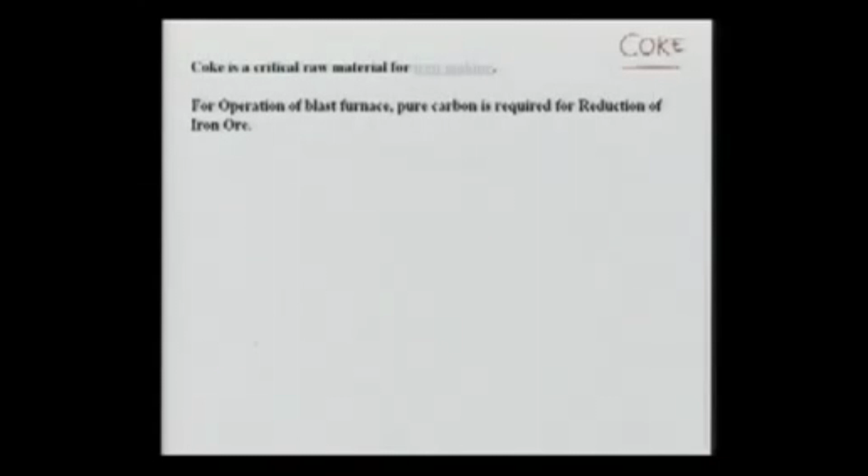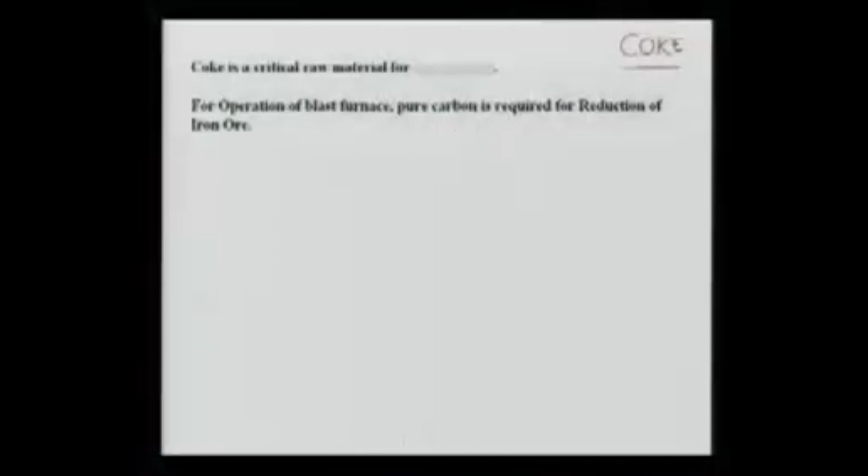So let's see what the coke really is and how it is manufactured. In all blast furnaces, if you recall from your high school metallurgical processes, for operation of the blast furnace, a pure form of carbon is required for the reduction of iron ore, and that also needs to supply some kind of energy. So this reduction undertaken in the blast furnace is essentially because of the coke. Coke is very essential in manufacturing of steel and iron, maybe in the large plants or in the small plants, and this pure carbon is called coke.

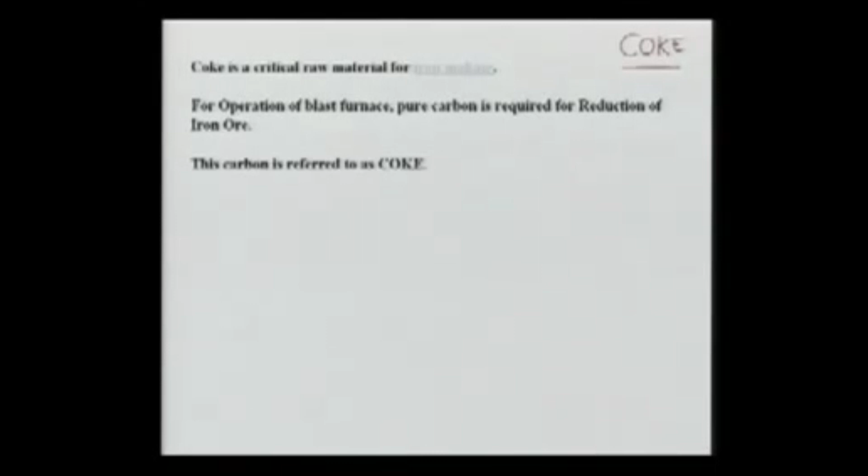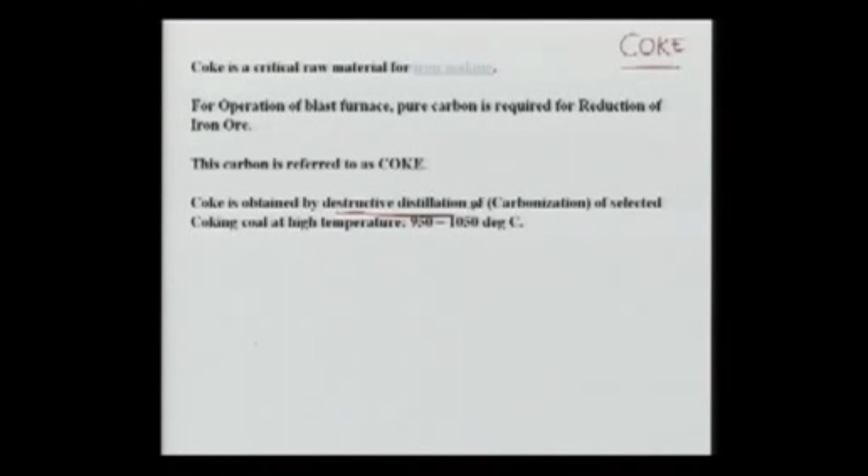How it is manufactured, we'll go very briefly through the process. Coke is obtained by the destructive distillation, and that process of destructive distillation is called carbonization of selected coking coal. That's very important. The component here is selected coking coal at high temperatures, that's about 950 to about 1050 degrees Celsius.

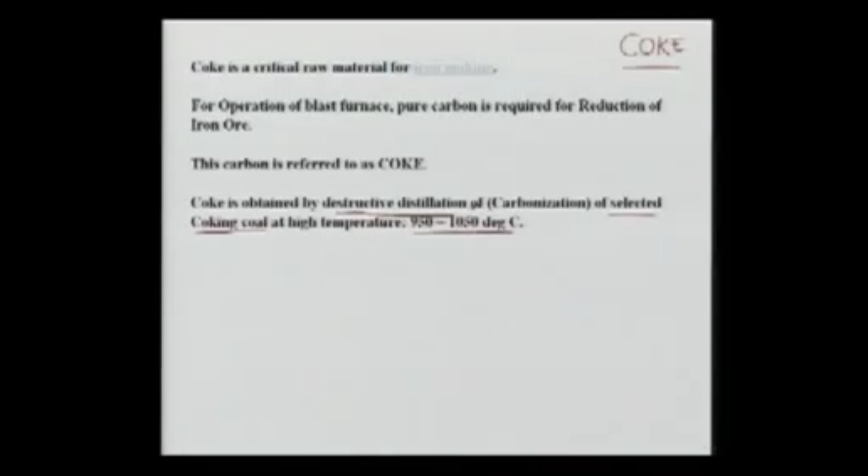Why I'm underlining the selected coking coal is that not all kinds of coal can be used for the manufacturing of coke, because we need very high quality coal with very low ash content. We don't want ash to be present in the coke, because if we have ash, that will interfere with the steel making and we won't be able to make good quality steel. So it's very important that only good quality coking coal is used for manufacturing of coke.

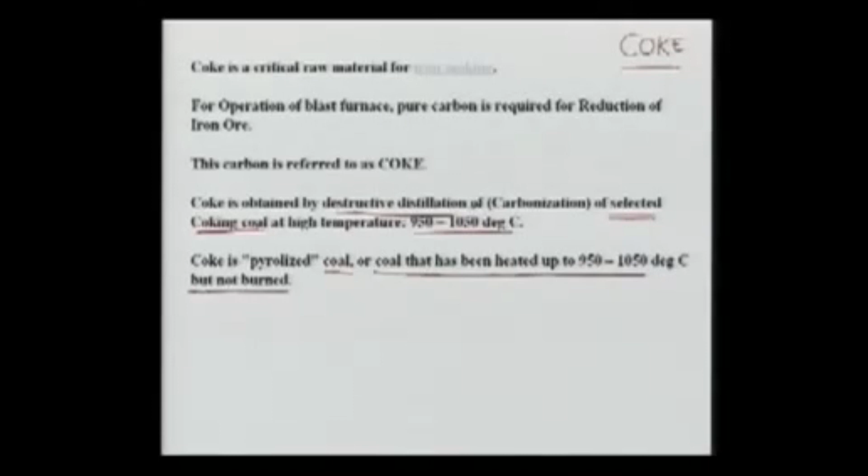Then coke is basically pyrolyzed. Pyrolyzed means heating something in the absence of oxygen, or near absence of oxygen. The coke is pyrolyzed coal, or coal that has been heated up to 950 to 1050 degrees Celsius, but not burnt. We don't want to burn the coal, because out of the coal we want to produce the coke, and we only want to heat it externally. So in the process, when we are heating it, what happens to the coal, we will see in a moment.

When you are heating the coal, complex organic molecules are formed. Those molecules break to yield gases, and we will see what kind of gases. Some kind of liquid also comes out, and solid organics also come out in the process of carbonization. But what is left, and what is of importance to us, is the non-volatile carbonaceous residue, and that is what we call coke.

And we will see the process of coke manufacturing in a little bit more detail, so that we can identify what are the sources and what is such an important issue associated with coke manufacturing that we need to discuss in this course.

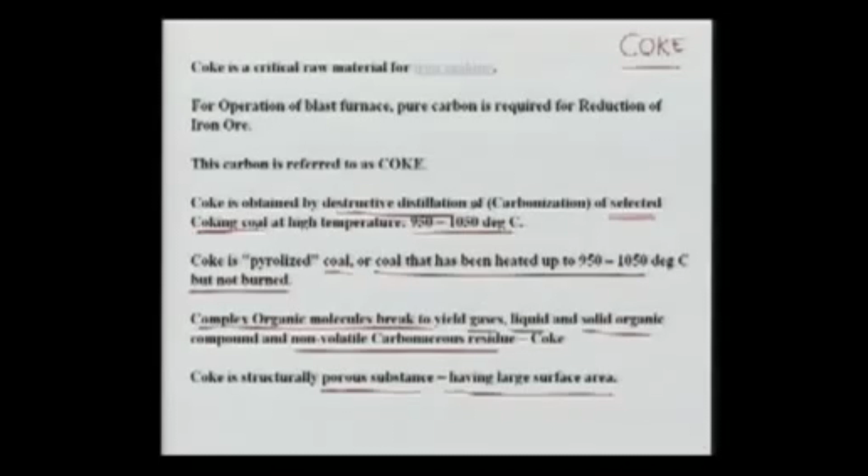What coke structurally looks like, if you look at the coke, it is a very porous substance, and the idea of having it in a porous form is to have a large surface area, so that the reaction, especially the reduction process that is going on, effectively takes place in the blast furnace or wherever you are making the steel.

Let's see a picture which is more of a schematic picture, and that gives you an idea. I'll give you the idea of the dimensions a little later, but just see what it takes to make the coke. Here you are looking at the schematic picture, and this figure is the general layout of the byproduct coke oven battery. I'll explain what is the meaning of the byproduct, but what you see here is a long housing kind of thing, and there are lots of slits, as you can see here. For example, I'll just hatch a small slit here.

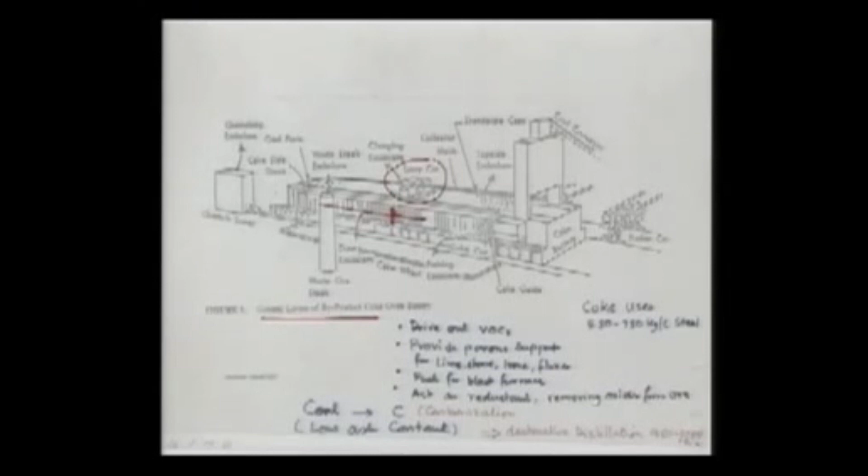This is what's called a coke oven. There's a series of ovens, as you can see, there could be hundreds of them in this direction. On top is what we call the Larry car, which holds the coal and fills the ovens from the top.

Down here you see little rectangles, that's where the heating is done. Gas is burned through this area, the heated gases go up and cook the coal, which gets heated up in the process, and emissions of gases or complex molecules get emitted. Once the coking operation is complete, the coke is ready, and as you can see, coke is pushed out and put into the coal car.

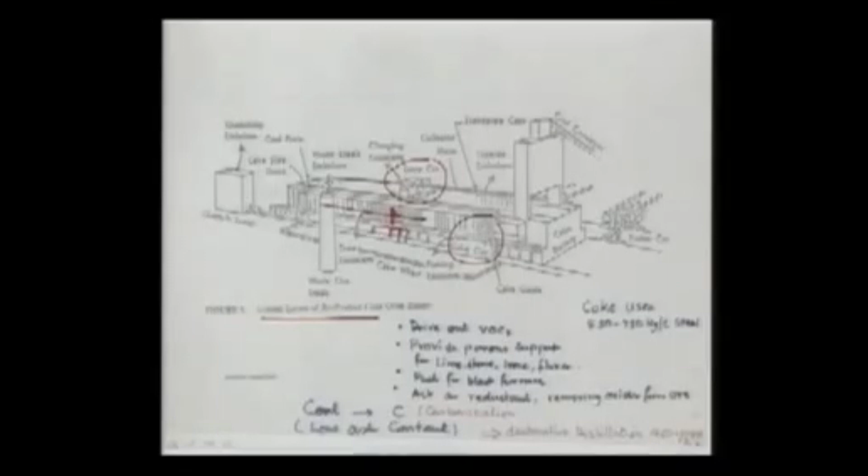The idea here is to drive out the VOCs, which stand for volatile organic compounds. We don't want volatile organic compounds because we want the pure carbon. So we basically heat things up, whatever is volatile will go away, providing porous support for limestone and other fluxes in the blast furnace. It's also a fuel for the blast furnace and acts as a reductant, removing the oxides from the ore. So basically we are transferring coal into carbon using destructive distillation.

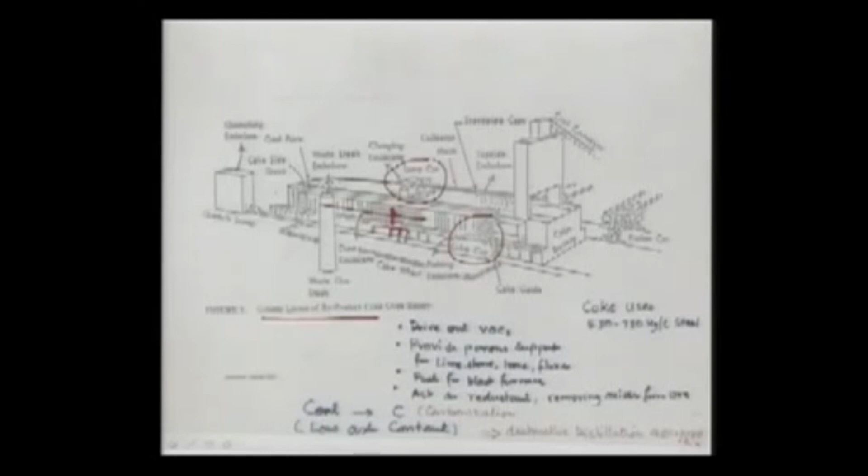What I would do is show you a bigger picture, so things become more clear to you, and that picture just follows.

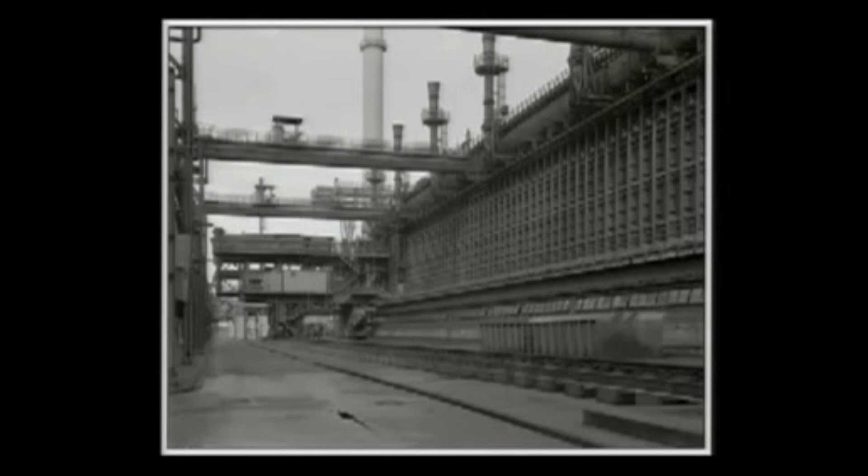This is a picture taken from the side or from the ground. You see here the Larry car was somewhere at the top, the person was standing somewhere there, but now we have the picture taken from the ground. These are the ovens, as you can see, this slit here, for example, is an oven.

Here at the bottom is what we call the under-fire. Some heating is done here, and this heat flows, the hot air flows around the oven but doesn't come in contact with the oven, because we don't want to burn the coal, we just want to heat it. It's like cooking in the kitchen, we don't want to burn our food, we just want to heat it. So the coal is heated externally, and the under-fire heats everything and goes out through this chimney, as you can see.

After some time, once the coke is ready, because we have to cook the coal at a temperature of about 950 to 1050 degrees Celsius, and the cooking normally takes between 20 to 30 hours, once the coke is ready we need to push it out, and then we will see.

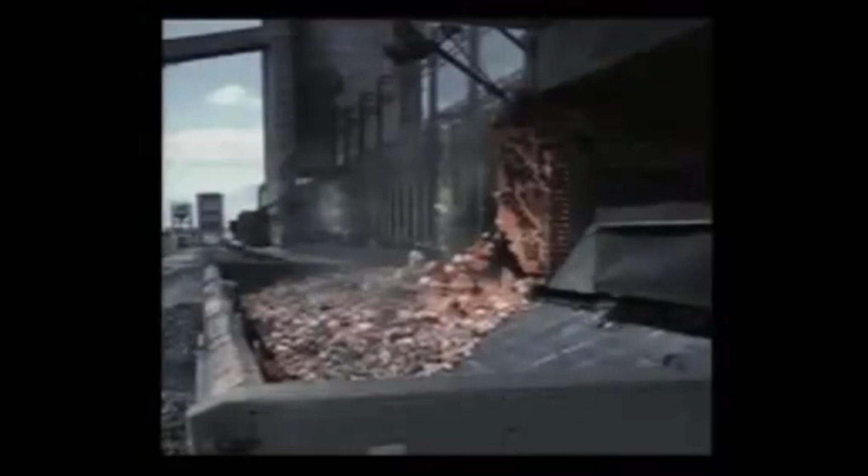Okay, maybe I'll show you this picture before that. We will show the next picture. See, now what is happening is coke is ready, so it must be driven out. So you see here the coke is being pushed from where? From the ovens. So see here the red, it is not burning, but it's a very hot thing, and then here what you see is another car or cart, if you like, then quickly it is transferred here, and then this must be immediately cooled, and we'll see how this is cooled in a moment.

So this is what the real picture was, just so that you get an idea as to what is happening, what are the size of the machines that we are talking about. They are huge things, and it also means huge pollution. So what we would do is show you the earlier slide. Okay, now we will talk specifically about the sources of the air pollution.

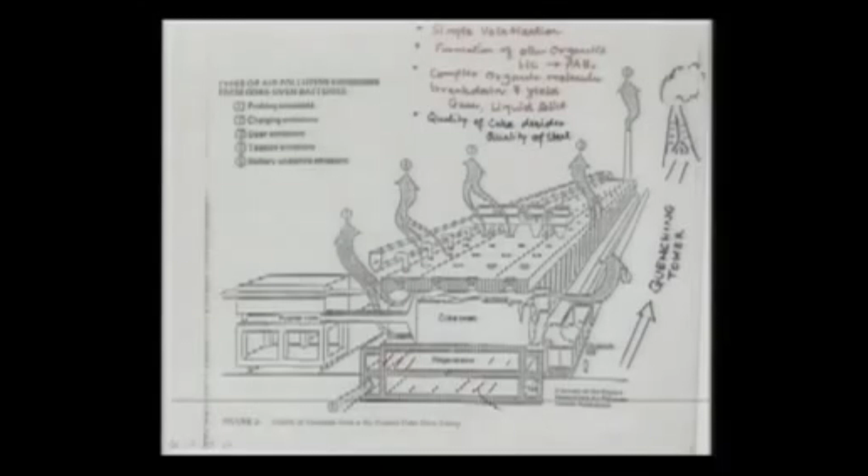Okay, so here what you see, now you have the clarity. Now we are seeing both the pictures from the top as well as from the side, and also the bottom portion. And the bottom portion, as you can see here, is a kind of regenerator, but mostly we call it under fire. Under fire means we are firing some gases to give us the heat, and that heat should be used by the ovens. And you see here inside this picture, this is your coke which is being made ready.

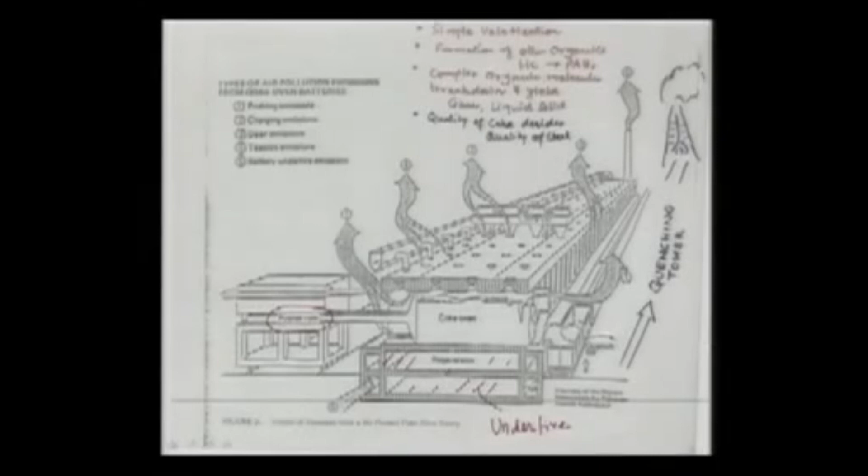Okay, so this is coke, and as you can see here, as coke gets ready, it's being pushed. You see here, this is called the pushing arm. The whole thing is being pushed, takes a lot of energy, huge machinery requirement, and you can see this whole thing is falling down onto what is called the quench car. Can you see here? Quench car. Why quench car? Because we must quickly cool off the hot coke.

If we don't cool it off, what will happen is, it's hot, it's open in the air, oxygen is available, and when oxygen is available, things start burning. So in fact, if you don't take it and quickly quench it, it's going to catch fire, and you can see the flames coming out, and our entire purpose of coke making will be defeated. So as soon as the whole thing is out, we should quickly take it to the quench tower. The whole thing is like on a railway track, and this is pushed quickly in this direction and taken to the quenching tower.

I have drawn this picture of the quenching tower, and we'll see a little later what the quenching tower is and what it does. But the idea of the quenching tower is to put lots of water, tons of water, which is stored on top, onto this coke, because we need to cool the coke down. We don't want it to be exposed to the atmosphere so that it starts burning. Then we are in trouble, both from the pollution point of view as well as from the production point of view. So this is one part.

Let's go back onto the top of the coke ovens and see what is happening. You see here the coke oven top. This is the Larry car which I showed you, and these are what we call the charging holes. For example, this is a charging hole, this is a charging hole, this is a charging hole. So the Larry car moves back and forth, and it fits exactly onto the charging hole. For example, whatever this oven is, that's being charged. So here this is a hopper of the Larry car which has coal, and this is another hopper which has coal, and it is dumping the coal inside the oven.

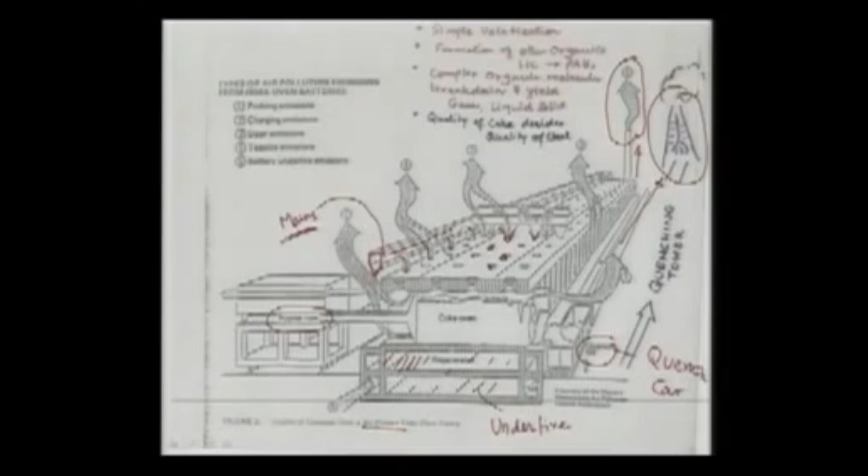So now pay a little attention: although we have the mains, and most of the emission is being collected and going to byproduct recovery, where we'll control this source, in spite of having this system there is still air pollution that takes place. The major sources, as you can see, are listed as number 1, number 2, number 3, number 4 and number 5, and I would also say number 6, which we will talk about in a moment. So number 1, as you can read here, is called the pushing emissions.

See here, pushing emissions, because as you are pushing, whatever vapor compounds are there are getting emitted from the sides. Earlier everything was closed, now it is open because we are taking things out. So all these emissions take place.

The second thing you can see here is the charging emissions. The charging emissions are when you are charging the coal, and who is charging the coal? The larry car. When the coal is being charged, as it replaces the space or the air underneath, the emissions take place. That is emission number 2, and this is a very significant emission. In fact, the person wearing the mask in the picture I showed you was trying to stay far away from the larry car so that he is not exposed to the air pollution. So here the emission takes place as the coal is being fed into the oven.

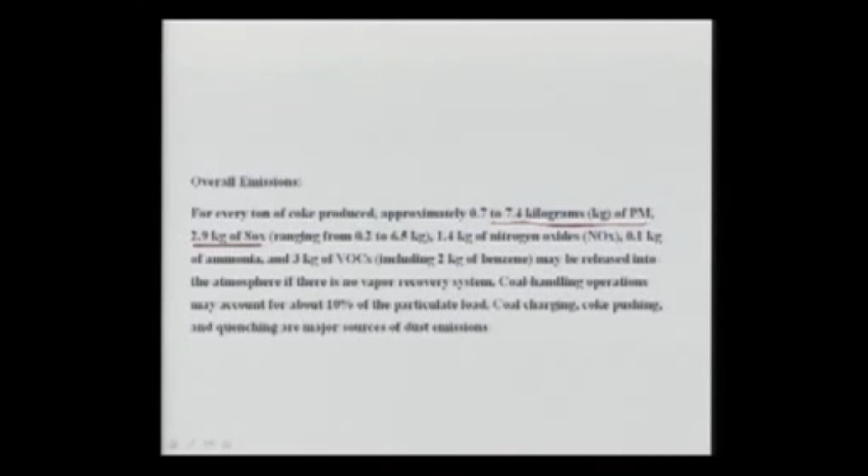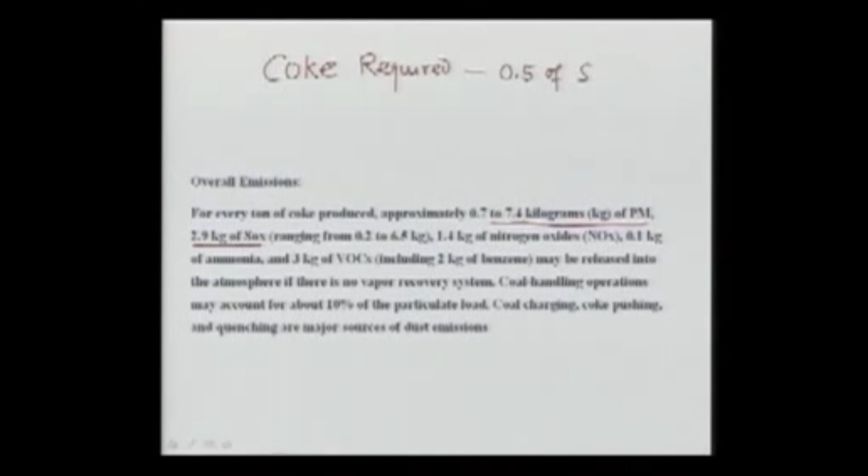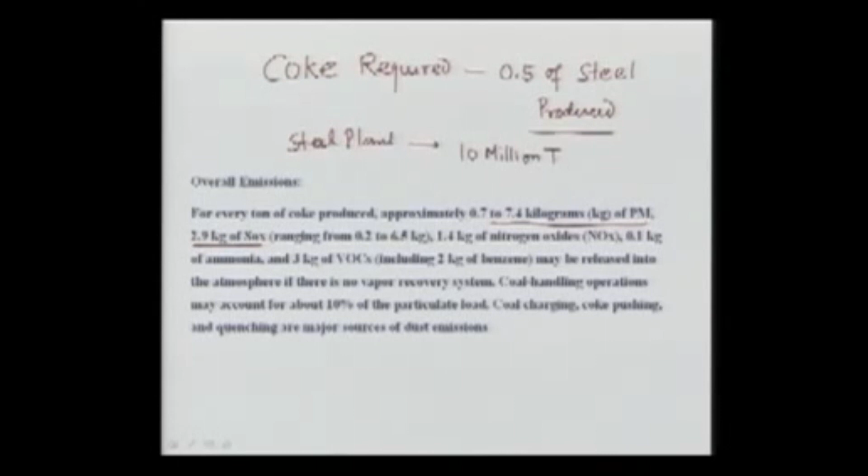I'll give you a little feel right now as to the coke requirement, so that you know the quantity of coke required. It is almost 50% of steel produced, and you know that steel plants are very huge, very big plants. Steel plant size varies, but a typical plant on the larger side can be a 10 million ton plant. This is a very large plant, with an annual capacity of 10 million tons.

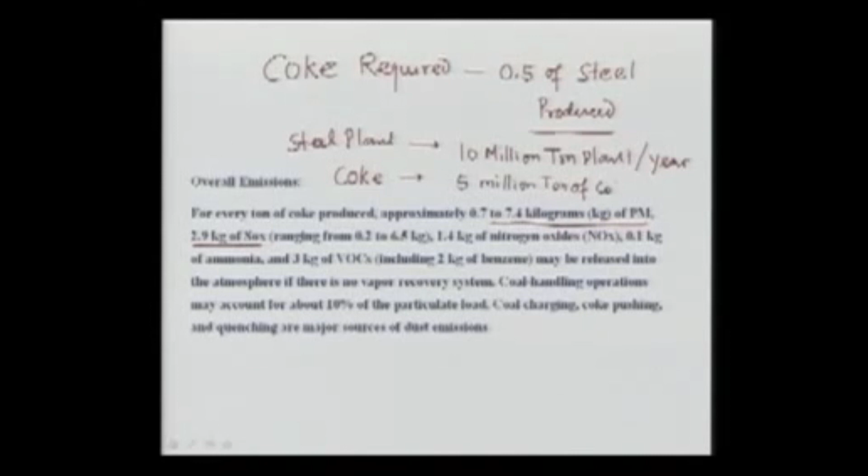So, to give a little feel, this plant will require approximately 5 million tons of coke per year. See, these are not small quantities that we are talking about.

And then once we are making the coke, what are the emissions taking place? 0.7 to 7.4 kilograms of particulate matter, 2.9 kg of oxides of sulfur, 1.4 kg of nitrogen oxides, 0.1 kg of ammonia. Look at that. You wouldn't expect ammonia, but ammonia is also emitted. 3 kg of VOCs. You remember VOCs stand for volatile organic compounds, and most volatile organic compounds are cancer causing and can very adversely affect human health.

So that becomes very, very important. Including 2 kg of benzene, and you all know benzene is a carcinogenic compound. Benzene is also emitted from automobiles, and we all talk about benzene control. But this is in no way a small amount; this is a huge amount, and may be released into the atmosphere if there is no vapor recovery system.

Vapor recovery system is the same as I was talking about, the byproduct recovery plant. If there was no byproduct recovery plant, the emissions could be of this order as specified in the slide. Apart from this, coal handling operations may account for about 10% of the particulate load. Coal charging, coke pushing and quenching are always a major source of dust emissions.

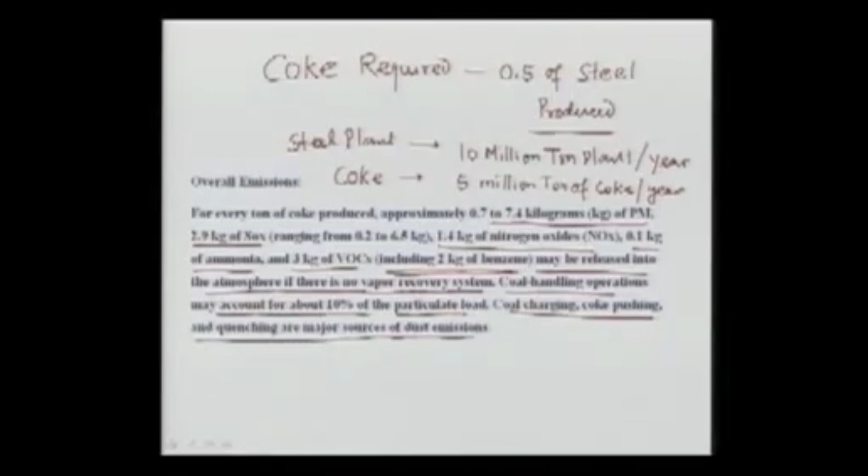So you can see both in terms of quantity the emissions are large, and also in terms of toxicity, because some of the compounds that are emitted are very serious cancer-causing compounds, and we need to control them. Okay, let's go to the next slide.

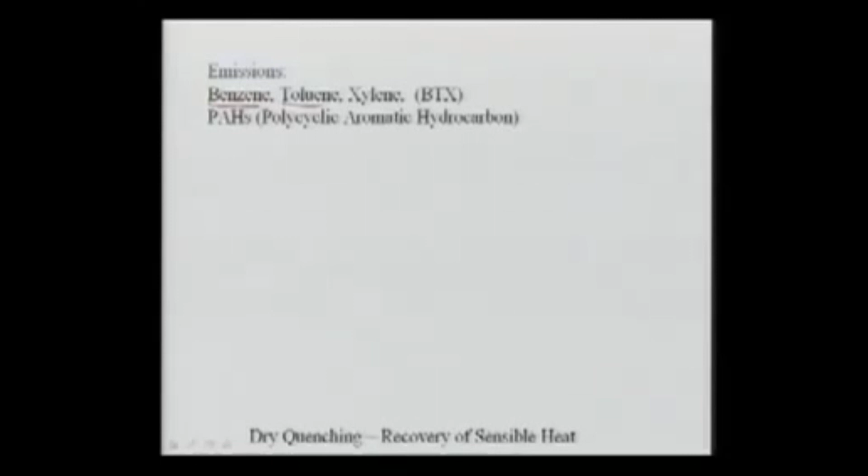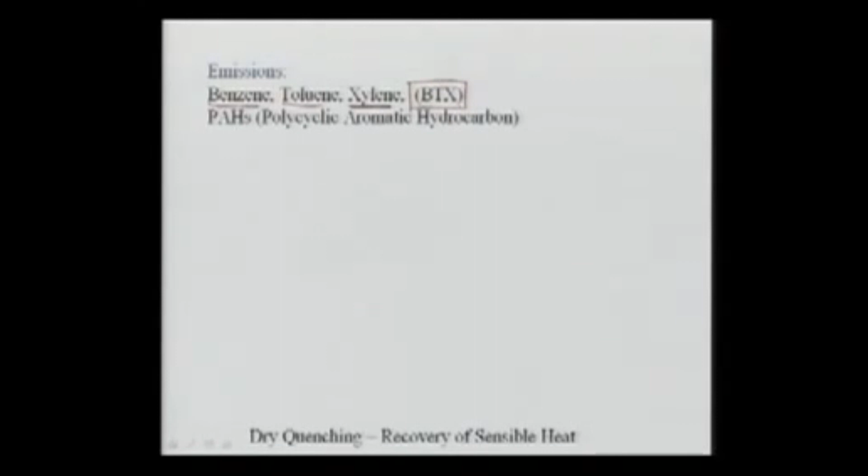So the emissions are not only particulate matter, SOx, ammonia, but there are more things. Now we are trying to get a little more specific about the kind of pollution taking place. Benzene I said earlier, but toluene is also emitted from coke making, and so is xylene, and the common name given to these three compounds is BTX. In the rest of our discussions, we will refer to this emission as BTX rather than calling it just benzene, or benzene, toluene, xylene.

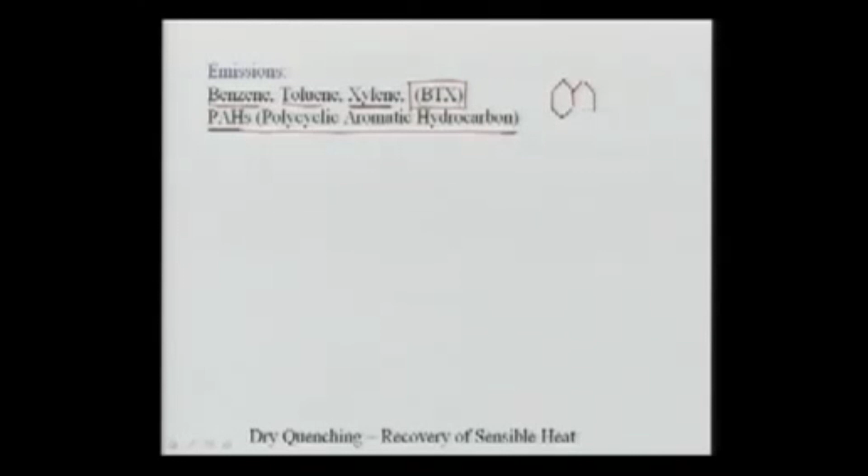Apart from that, these emissions also include PAHs, which are polycyclic aromatic hydrocarbons. These are again a group of compounds, very toxic, proven carcinogens, meaning they can cause cancer in the human body. So this becomes an important issue. If you don't remember what aromatic hydrocarbons are, when you have 2 or more benzene rings fused with each other, that becomes a PAH.

So you can see here there can be many benzene rings as I am drawing them, that can also be combined like this. Okay, this is a typical chemical structure of PAHs. This is just one compound, and in fact many hundreds of PAHs are formed, and most of them are carcinogens, which can cause cancer, and therefore we need to control them.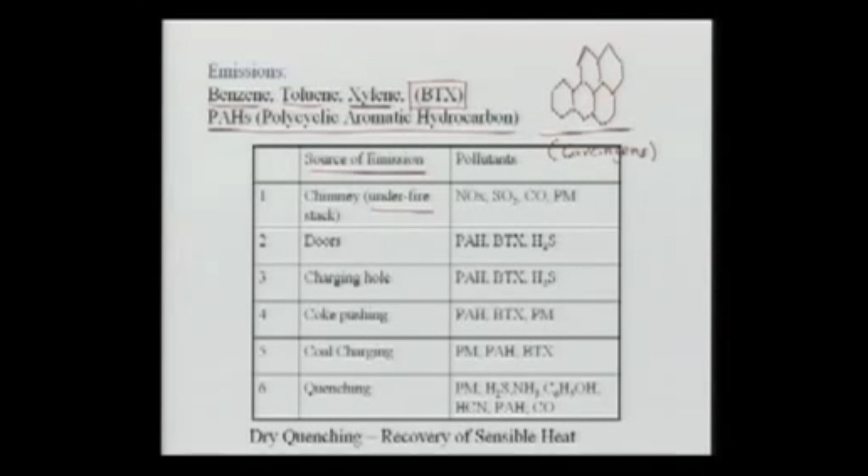So this is the table. What we had discussed were the sources of emission, but we didn't discuss what kind of emission comes out of a particular source. So I made this table so that you can see it depending on the source. As you remember, we talked about 1, 2, 3, 4, 5, 6. The first source was the chimney or underfire, so it will have combustion-related emissions, because here we are burning things.

NOx, you remember what NOx was? NOx is the summation of NO plus NO2. So you have NOx, sulfur dioxide, some carbon monoxide, and PM, which is particulate matter, that is the dust.

Now, we also remember the door leakages. We can simply write here door leakage, and what emissions will come out? PAHs, BTX and H2S. The dust is not likely to come out, but carcinogenic compounds, a serious problem. We also have benzene, toluene, xylene and H2S.

Why H2S? Because the coal may contain some sulfur, and we are not burning it; conditions are reducing. So this sulfur will come out as H2S, hydrogen sulfide gas. It is worthwhile to indicate that from the doors which are leaking, more H2S comes out, and as you can see here, the emissions are a little yellowish. H2S gives a little bit of yellowish color.

So sometimes you don't even have to go and check; you can see something yellowish coming out from the coke oven doors and say, look, this is the oven which is leaking, and we need to do something about it. If it was colorless, you wouldn't see anything or know what emissions are taking place. But the moment you see the yellowish thing coming out, you are sure that particular oven is leaking, meaning the door is not very tightly placed.

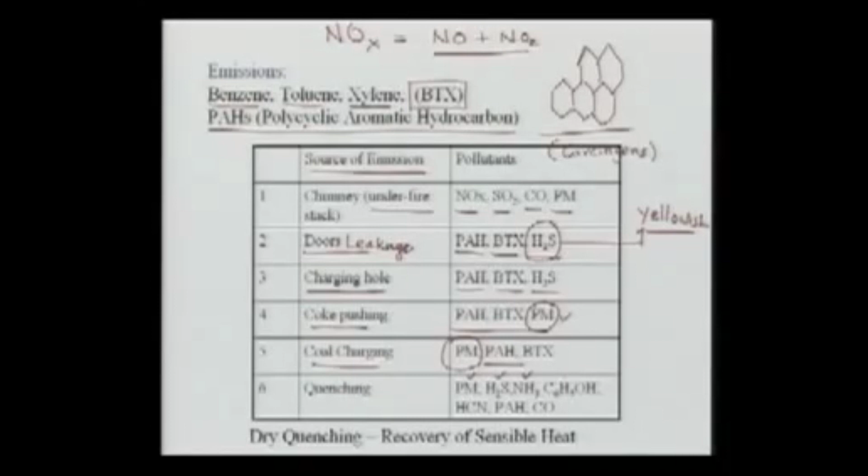In the quenching, when the coke is ready, then we are taking it for the quenching operation. We put tons of water onto it. So that very high temperature thing is cooled off. So there will be particulate matter, H2S comes out, a little bit of ammonia and some of the alcohols, and it has also been reported that some amount of cyanide in the form of HCN is either likely to be emitted in the air or will become part of the water, because we are quenching the coke with the water. So some of the cyanides also have been reported, some of the PAHs and some carbon monoxide.

So what we have learned here is that in spite of the good recovery system, and what was the recovery system? Through the mains, through the duct in which we are sucking the gases or the volatiles that were being formed, there could still be emissions, and these emission quantities can be large, and not only large, they can be very serious in terms of their toxic nature. So this issue of the coke ovens becomes very significant, because it has a direct and very significant impact on public health, and especially on the people who are operating the coke ovens. Remember the person standing with the mask on his face.

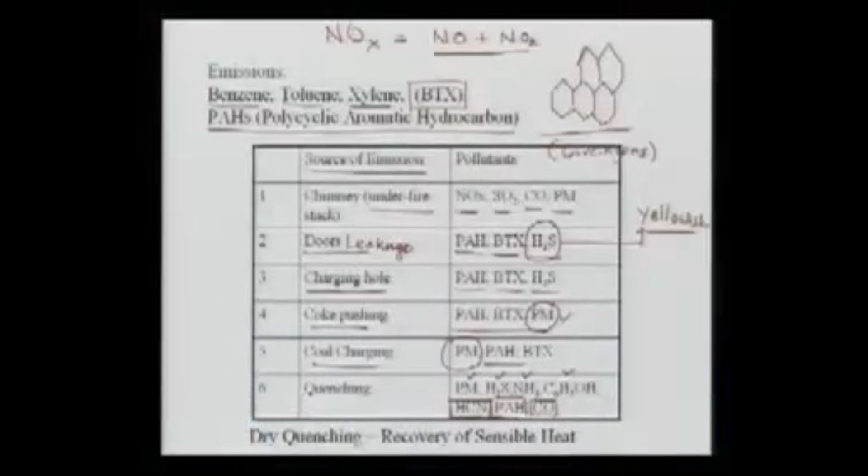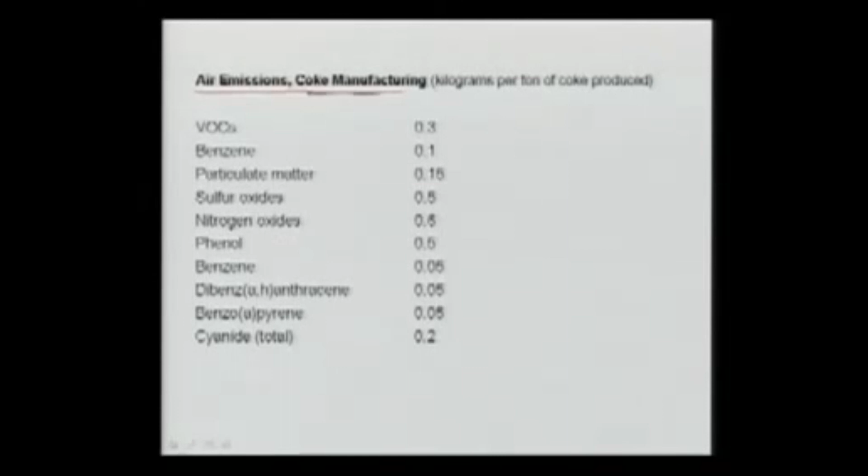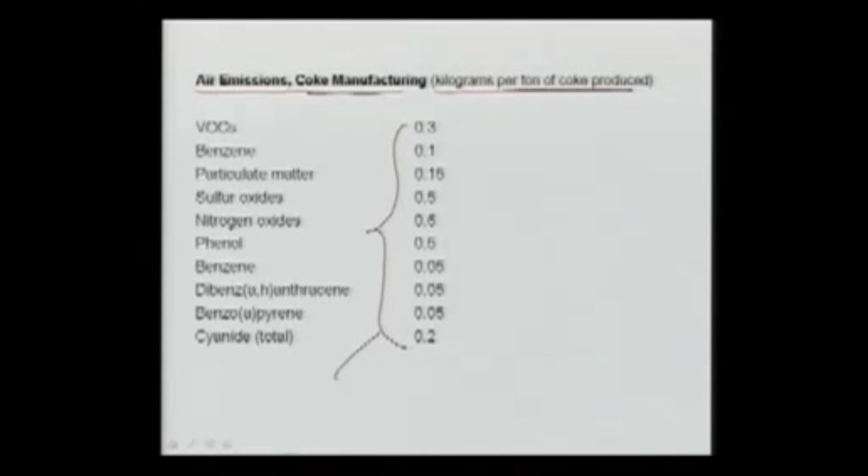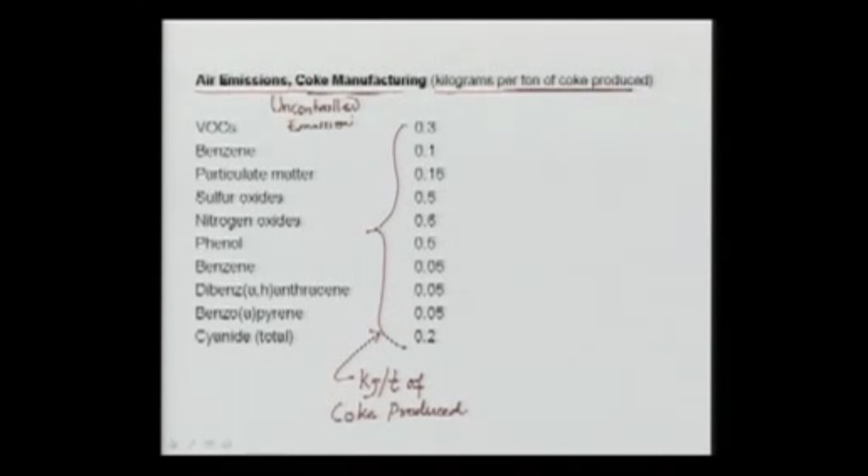Let's take our discussion further, and let's talk about some of the controls. So this is a little table here, and this table shows the total air emissions that can take place from coke manufacturing, and the units here, don't forget, are kilogram per ton of coke produced. What are the units? kg per ton of coke produced. Also I must mention here that these emissions are the uncontrolled emissions. These quantities are not small in any sense, they are really large quantities, and they can influence the air environment.

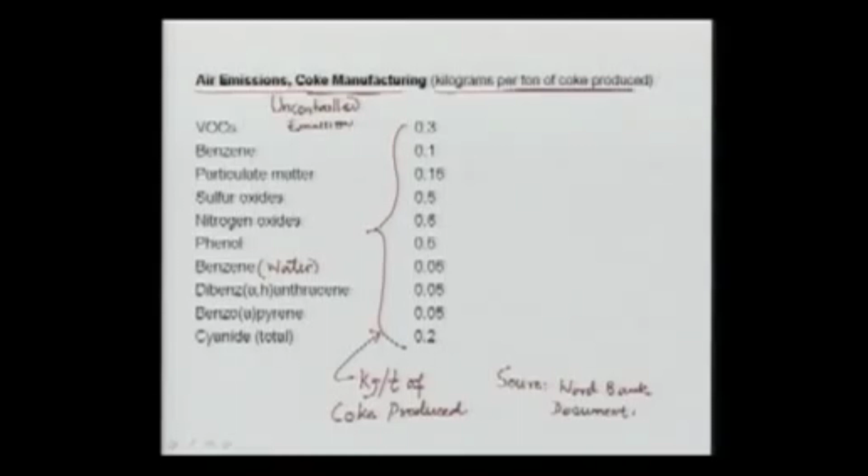You also have benzene here; this benzene is probably in the water, and the source where I have gotten this information is the World Bank. I should have given you the source actually, World Bank document. Okay, a fairly good idea of what is being emitted and what quantities they are likely to emit, and why the importance, because of the associated toxicity. Okay, I want to do an example for you just to give you a feel that these emissions are not small, they are serious emissions. Okay, the example is the following.

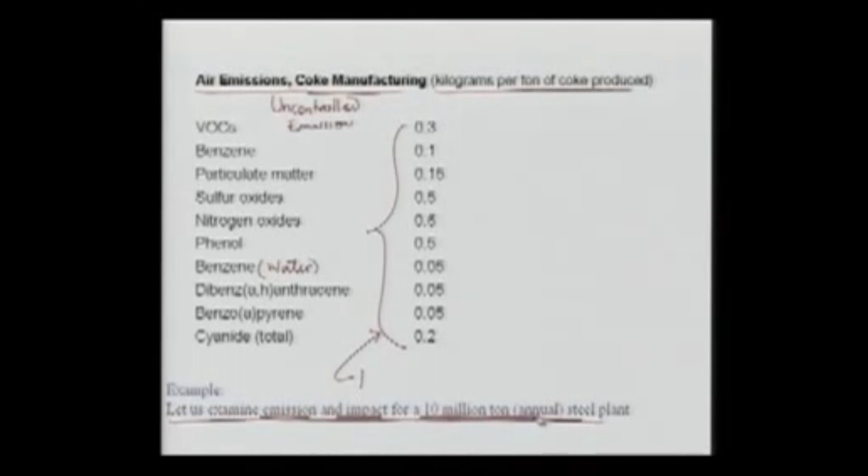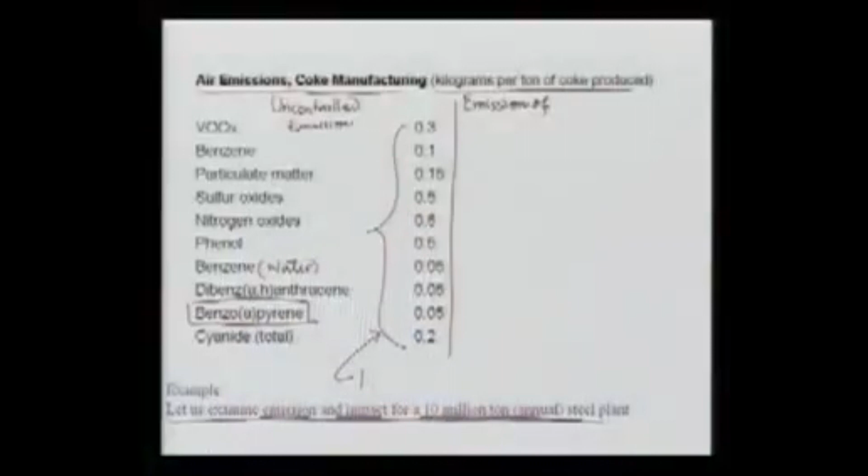Let's examine both the emission and the impact for a 10 million ton steel plant, which is producing annually 10 million tons of steel. So let's make a little space here. So we'll see the emission of, let's say, a compound. We'll just take one example. Let's take the example of this one, because this is the most dangerous compound in the category of the PAHs. Benzo(a)pyrene is the PAH having 5 benzene rings. So emission of BaP, in short we call it BaP. Let's say the uncontrolled emissions.

Okay, so for a 10 million ton plant, the coke that it needs to produce is how much? 50% of the steel that it is making. So the coke you need is 50% of the steel that you are making. And how much steel are you making?

Tons per year, okay, so this is my coke requirement, simple thing. Now I want to know the coke in terms of tons per day, because I also want to see the impact. So I have 0.5 into 10 into 10 to the power 6, and suppose I am taking about 350 days of the working of the plant. So if I take this as 350... am I doing right or wrong? Yeah, I'm doing right. Okay, let's write it properly.

Now this is the coke I need in terms of tons per day, not per year, so tons per day. Let's write the spelling correct.

Okay, now you can also tell me the BAP emissions, will be how much? Let's go to the factor here, 0.05 kg per ton of coke produced. So I can say the BAP will be 0.05 times 0.5 times 10 million, divided by 350. So that is what is my BAP.

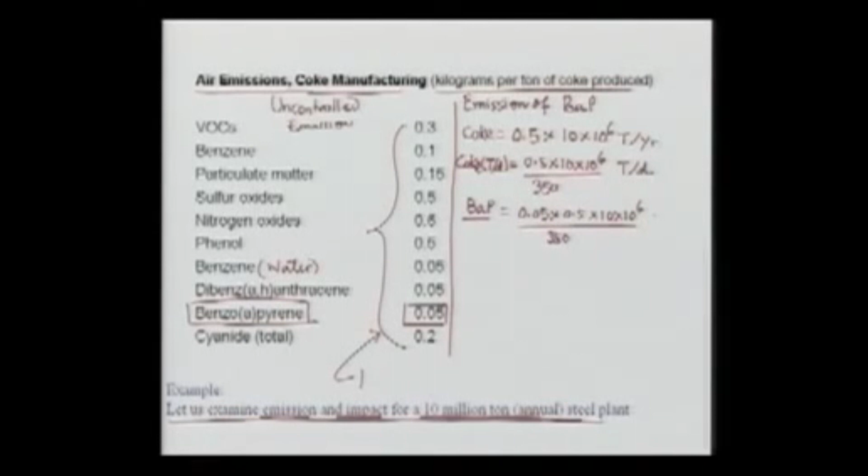Now you have to tell me the units of this one. What will be the units? Because don't forget the units are kg, kilogram, because this is nothing but kg per ton. So this will be my kg per day, because my factor has units of kg per ton. So much ton was producing, so for every ton 0.05 kg is produced, okay, so this becomes the BAP.

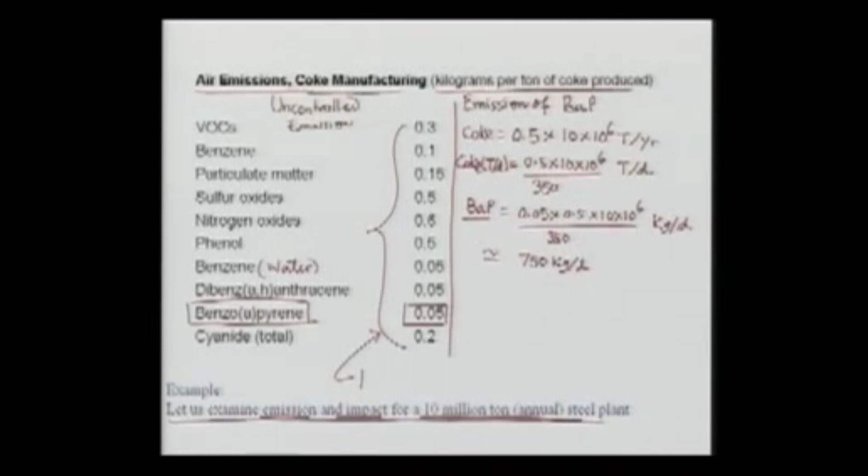So a little calculation, you will see that the BAP emissions come out to be approximately 750 kg per day, that will be nearly 750 kg per day. So what we are saying is that the emission of BAP, there's some approximation I have done here. So let's write it approximately 750 kg per day. This plant is likely to emit 750 kg per day if it is uncontrolled.

Don't forget that what I said here earlier, this is the uncontrolled emission. Now let's also see what it really means to the people living in that area, because after all, public health, good health of the people is what environmental engineers always try to do. So suppose, it's a simple example or calculation that we are doing. There are more complex, difficult ways to do all this. Assume that the entire BAP amount is spread into the volume of, let's say, 5 kilometer by 3 kilometer and height of 1 kilometer. Let's say everything disperses into this, and what it really means in terms of the concentration of BAP that people will be breathing in their lungs.

Okay, so that's what we want to find out, so let's do the concentration part. The concentration of BAP, and this is talking about every day, so almost 750 kg is emitted. How much volume? Let's write in meters: 5 kilometer equals 5,000, into 3,000, into 1,000. And then I can convert kg into grams, and this grams into micrograms, and the units now I am having is microgram per meter cube. So 9 zeros I can remove. So you are left with 750 divided by 15, and this comes out to be 50 microgram per meter cube.

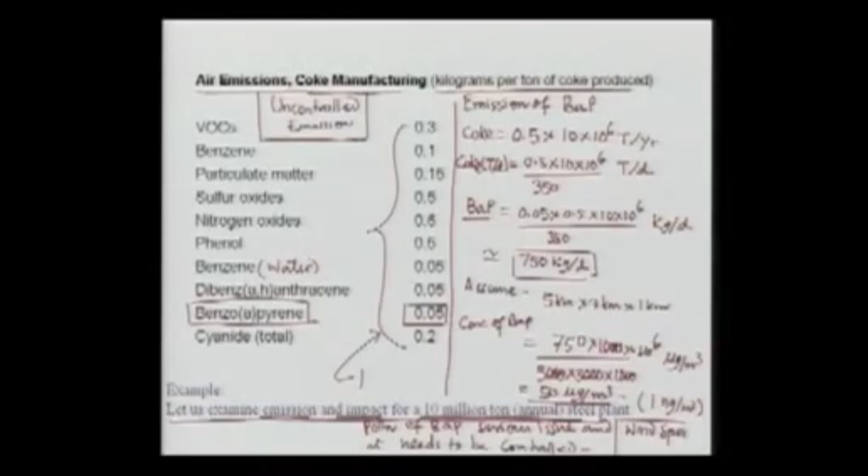Just simply saying BAP must be controlled is not enough, but in order to plan the control, we should know where to control, what are the sources and what are the difficulties. So we will talk about some of the control systems people are using. I think this is a simple calculation. Normally we should also account for the wind, but we have taken a simple example just to give you a little feel. The actual modeling part that we learn a little later in the course will require more information on the meteorology, the wind direction and other things, but that we won't discuss right now.

Okay, now let's talk about the control. Let's quickly recap what we have done so far. We have talked about the process, what is coke, why it is required, what is the process, what are the emissions, what are the emission sources, and within the emission sources what are the important compounds that we need to know. Then we did a little example to show how much quantities could be released and how much could be the impact.

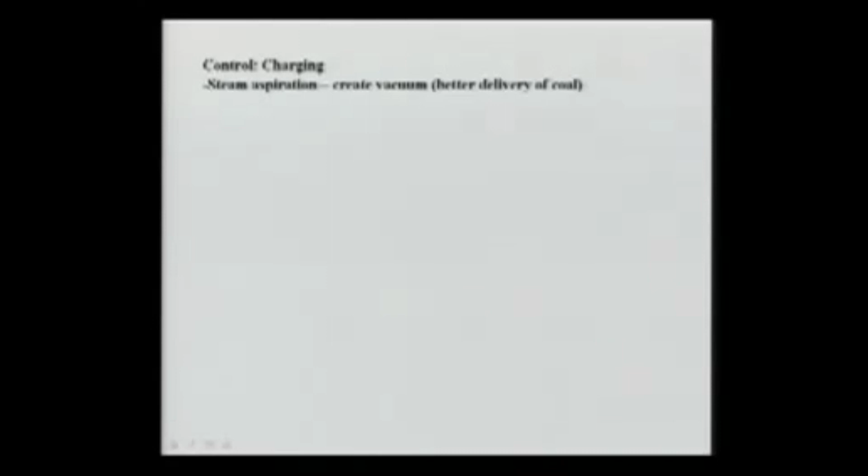So comes the question, we have concluded that we need to control. So what we do is, let's see, in the main duct, okay, the problem which we are talking right now is at the time of charging, what can be done.

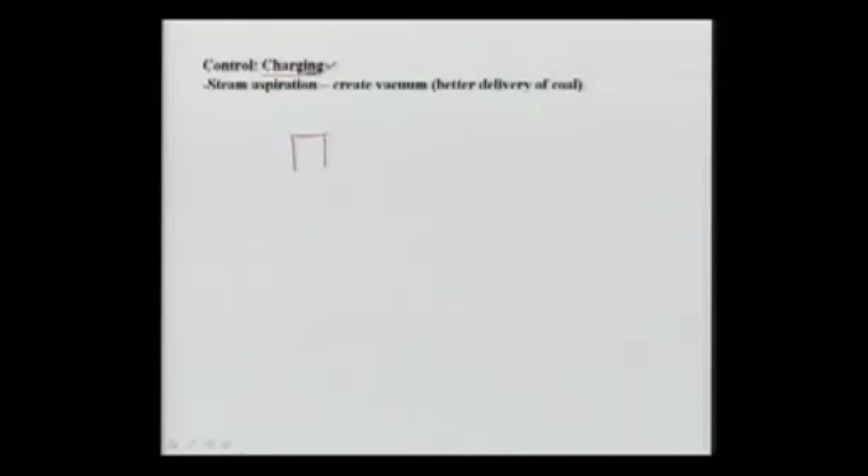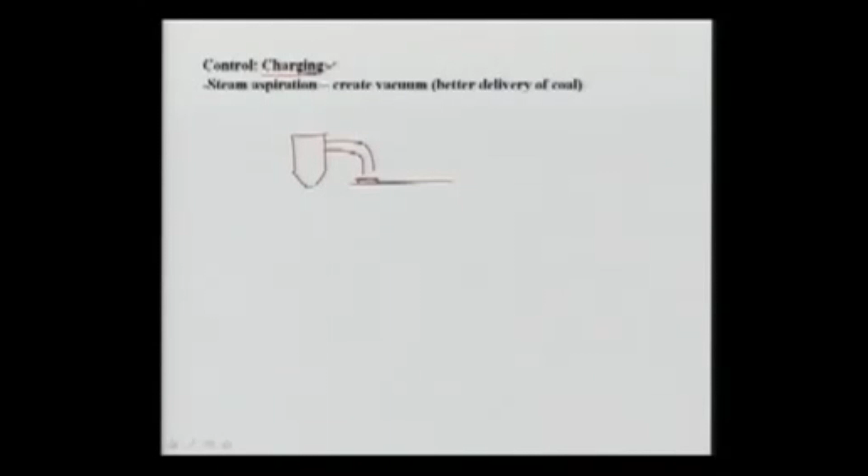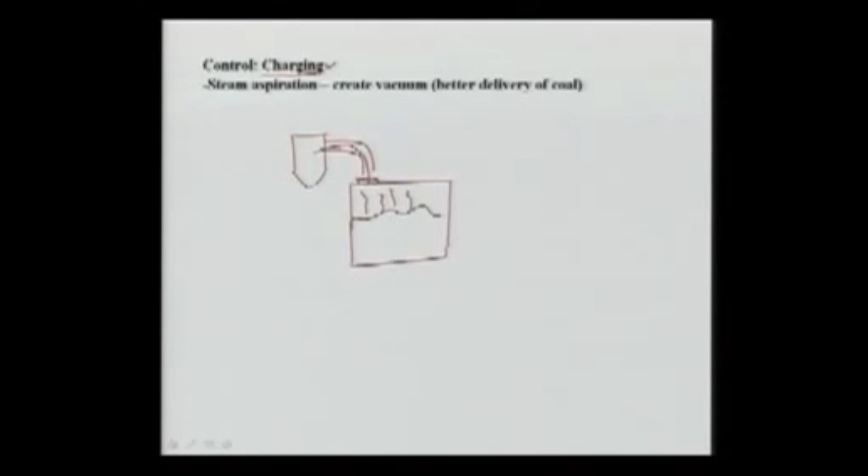So you remember there was a main duct, which was on this cross section of the battery, and this is the coke that is being made. Whatever emissions are taking place, because this is under positive pressure, they are sucked through this main duct, which passes in three dimensions if I need to make this. So what is done is when we are charging something, the Larry cart is sitting here and pushing something, so that is the time we should increase the vacuum, increase the suction rate, so that whatever emissions are taking place are taken out.

So how it is done: suppose at the side of this one I put some steam in there, it creates a little vacuum here, and quickly all these emissions will go through this thing. So that is what we do, create a vacuum, so there will be better delivery of the coal. So you understand, by creating more vacuum at the time of charging, we are sucking more.

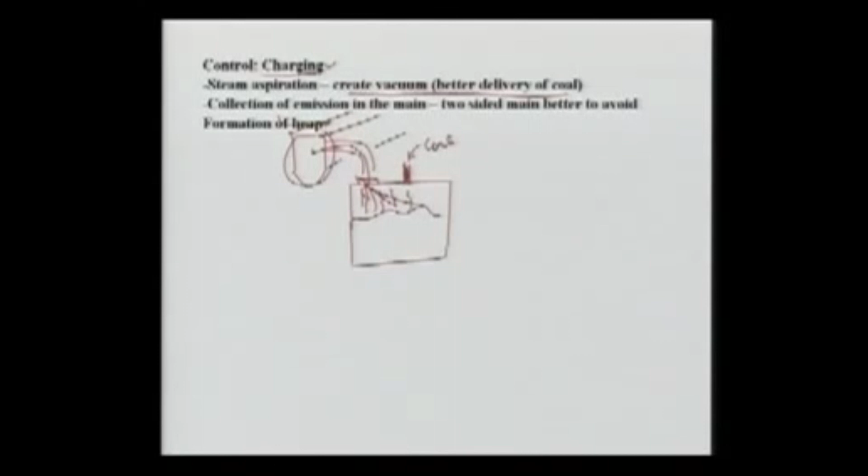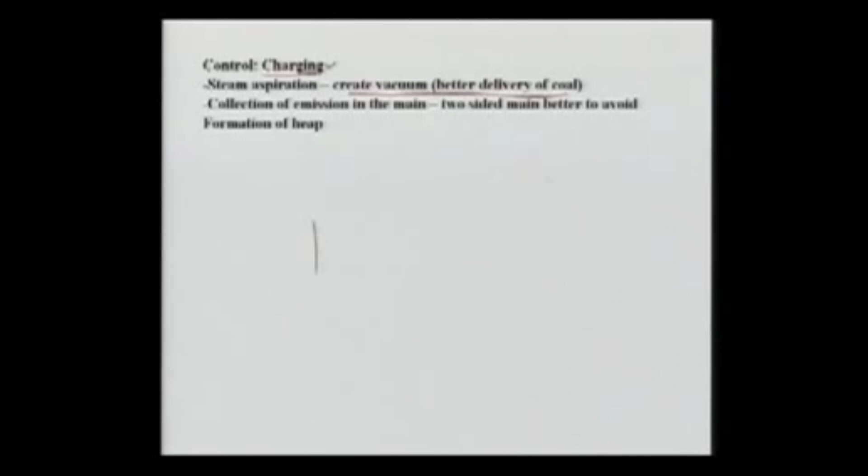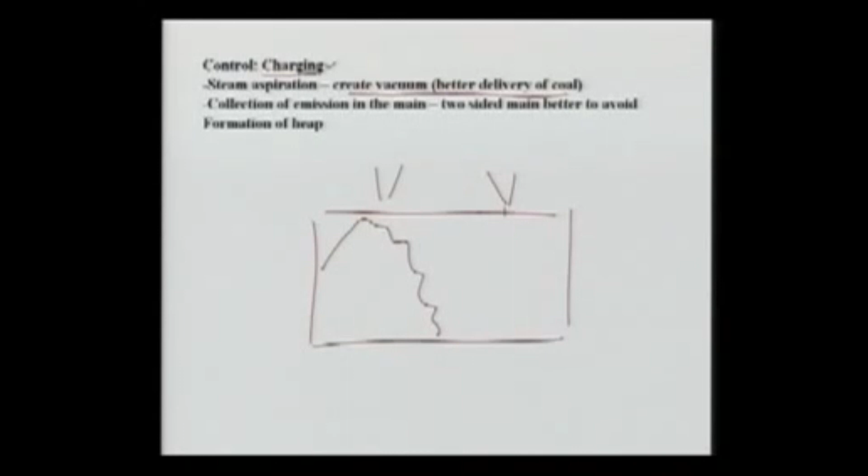Let me remove this so you can see it clearly. Collection of emission in the main, a two-sided main, is better to avoid the formation of a heap. See what is happening is that suppose you are charging something, and this is your oven, and as you charge from the Larry cart, it will form a kind of heap here, and as you charge this side also, you will create a little heap here.

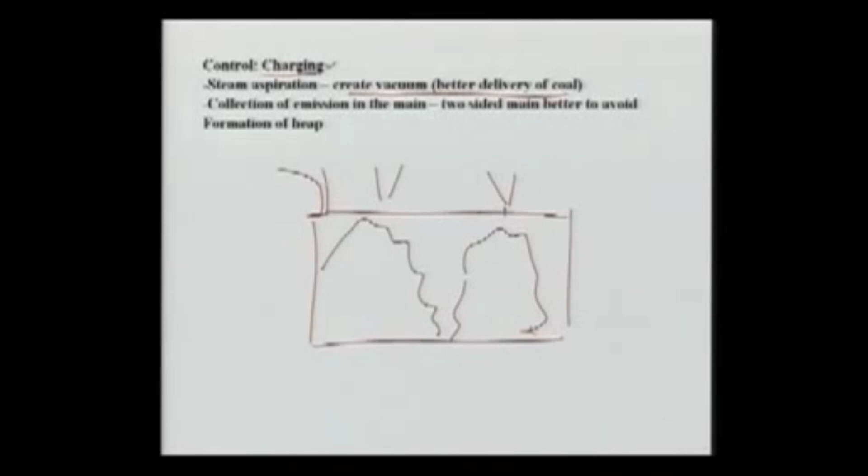So what is the new technology they are saying, you are taking this thing to the main pipe or main duct, which looked something like this. You should also do it from this side as well, so that from the two sides you are taking out the dirty air and not just from one side. And that's what is written here: collection of emission in the main, two-sided main, better to avoid the formation of the heap.

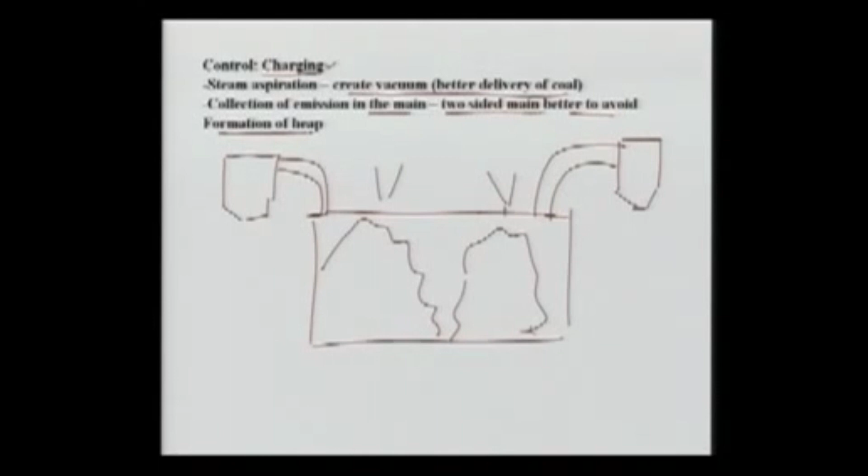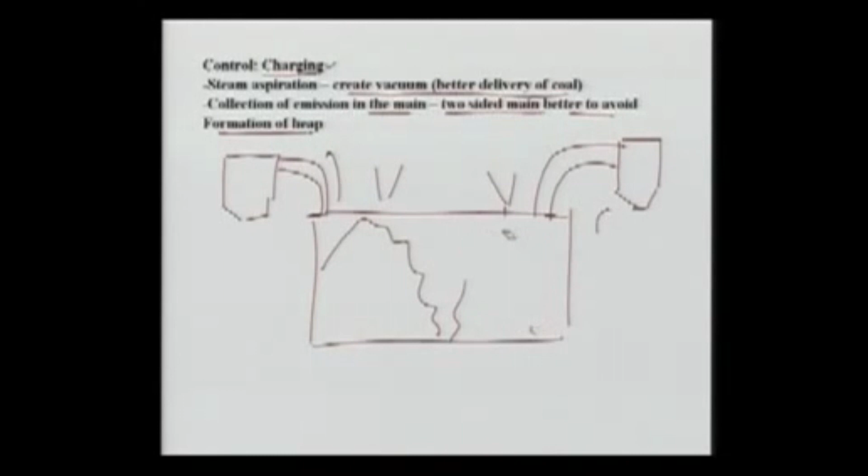So otherwise, see, a heap will be formed. If you are sucking here, the heap will not be formed. If you are sucking from this side the air and this side the air, the coal will not make a heap, but it will tend to spread out from all over the area, because you are also sucking from this side, so the coal will spread, and then the emissions, whatever emissions are taking place, will go to this main also and to this main also.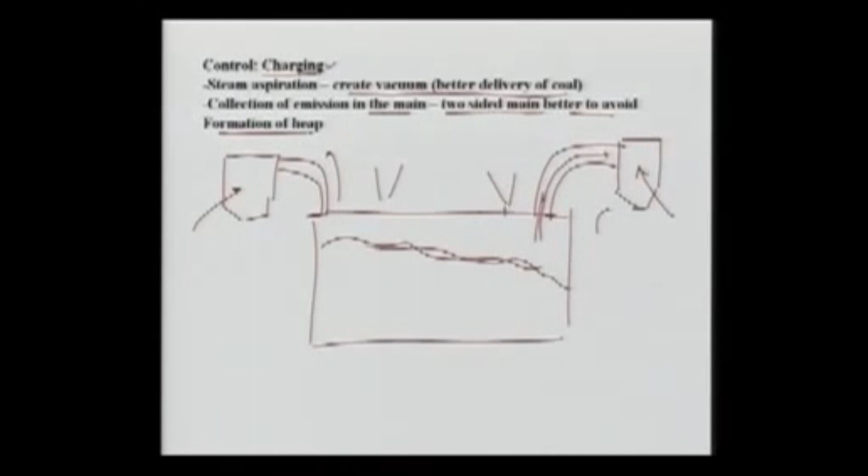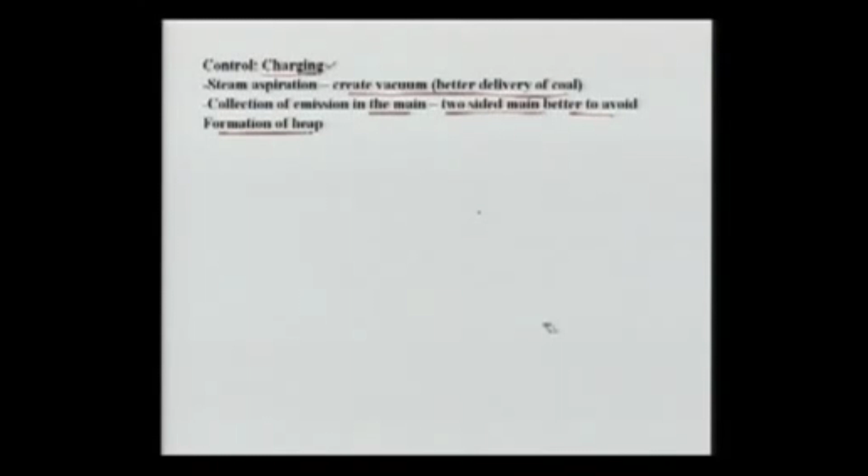And remember where the emissions are going, emission going to the byproduct recovery plant. So this is what once it can be controlled. The major pollution problem is during the charging, and we are able to resolve this problem. Emission is treated in the byproduct recovery plant. Once the emission is collected from the main, it goes to the treatment plant.

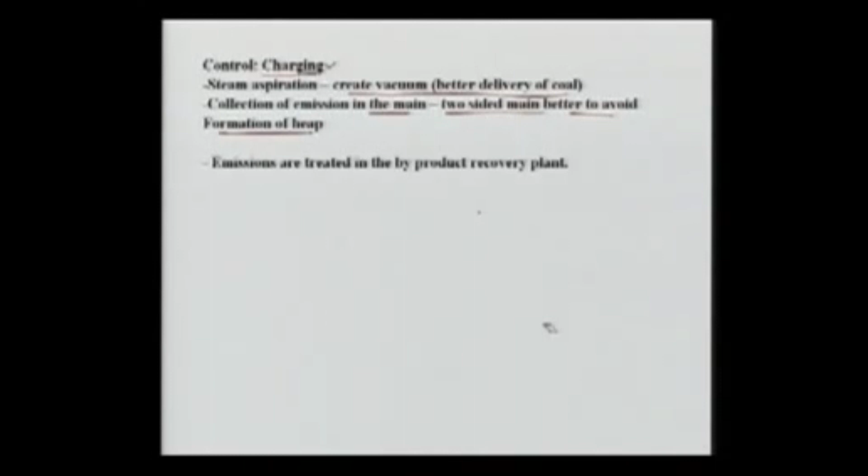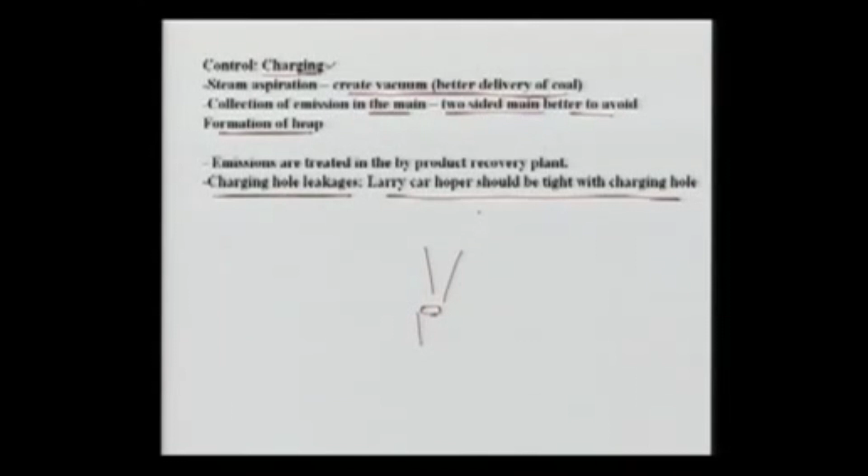Some people are also talking about the leakages. So the Larry hopper should be tight with the charging hole, as the Larry car is charging, and there's a hole here, so this must be made tight. Otherwise, what will happen, the leakages will be from here. This is the Larry car, for example, and this is the oven, so the fitting should be very tight.

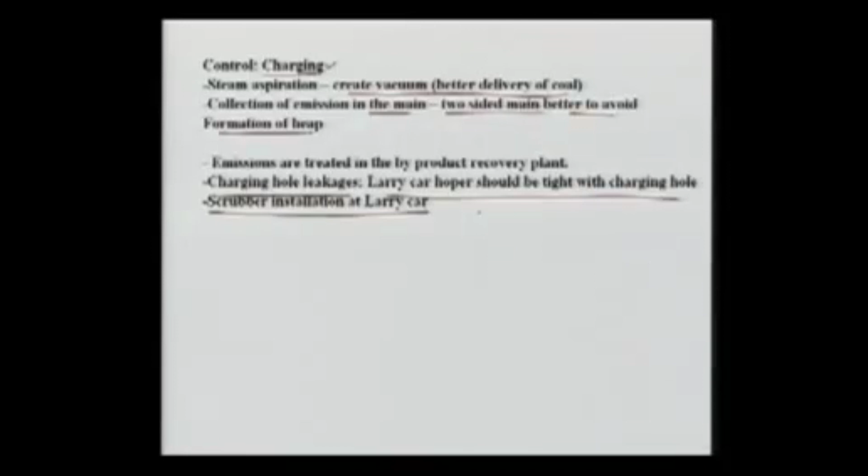And sometimes on top of the Larry car, a scrubber is provided for whatever emissions are taking place, so that they are passed through the scrubber process.

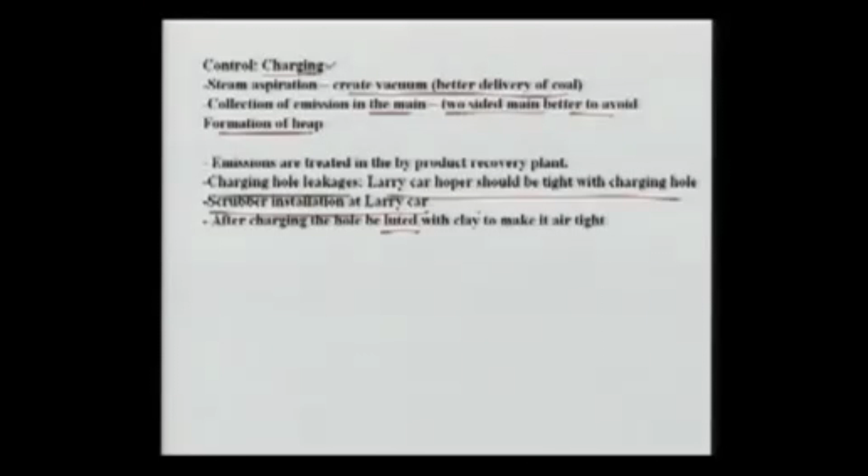After charging, the hole must be luted. Luted means closed and sealed, like the M-seal. Luted means you put some chemical around this, mostly clay, so that the charging hole becomes airtight.

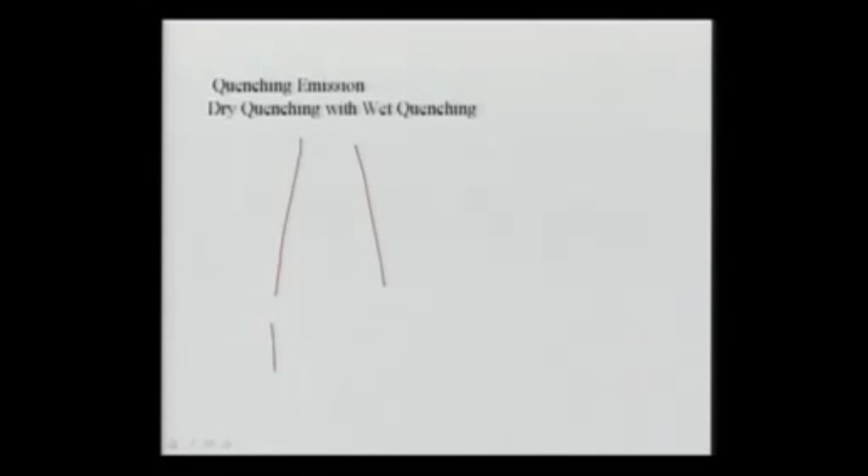In quenching towers, the cart with hot red coke is brought underneath, and there is a water tank on top. You open this water tank and water starts falling down to cool the coke. But in this process there are a lot of emissions, so baffle trays are provided so that the dirt has to travel this path, and because of inertia the dirt will fall down. This is called wet quenching.

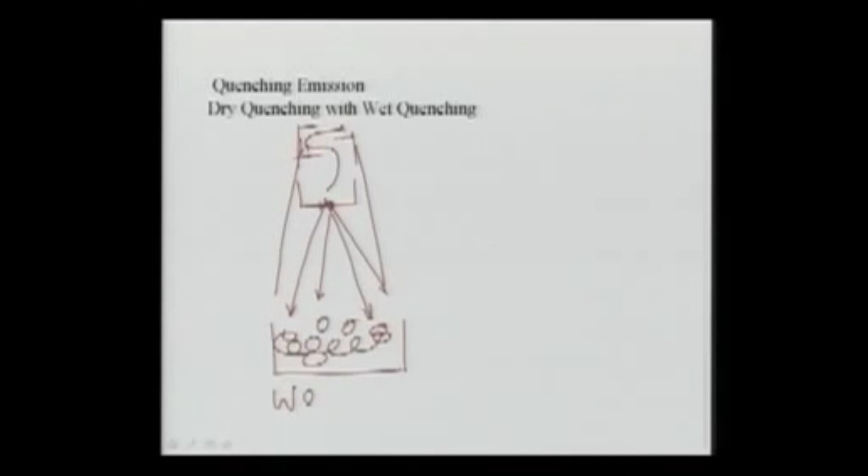The latest technology is dry quenching, an extraordinary method. You have the cart, and you use an inert gas like nitrogen to cool the hot coke instead of water. Since we are cooling it with gas instead of water, there are no emissions, because the emission takes place due to putting a lot of water onto it.

Additionally, the big advantage the dry system has is recovery of sensible heat, which is a great advantage for production economy. The temperature of the coke is nearly 950 degrees Celsius, and that whole thing has to be cooled off, so a lot of heat would otherwise be wasted. Rather than wasting heat by putting water, we recover the heat using inert gases, allowing heat transfer to take place while the inert gases can be removed.

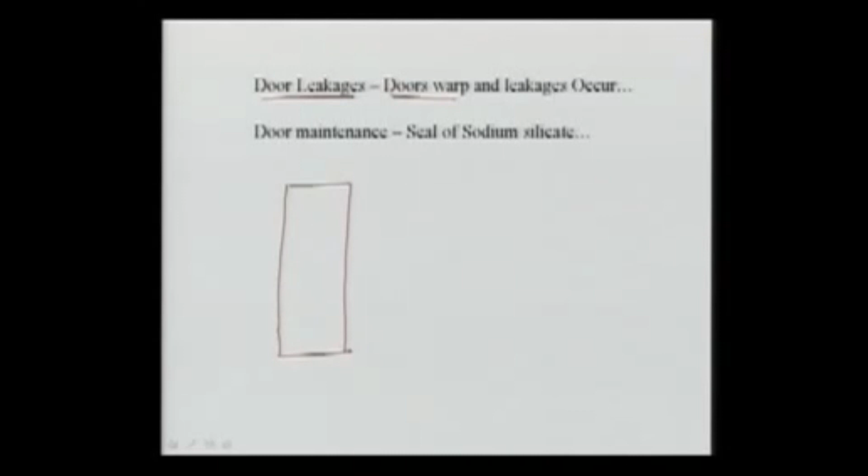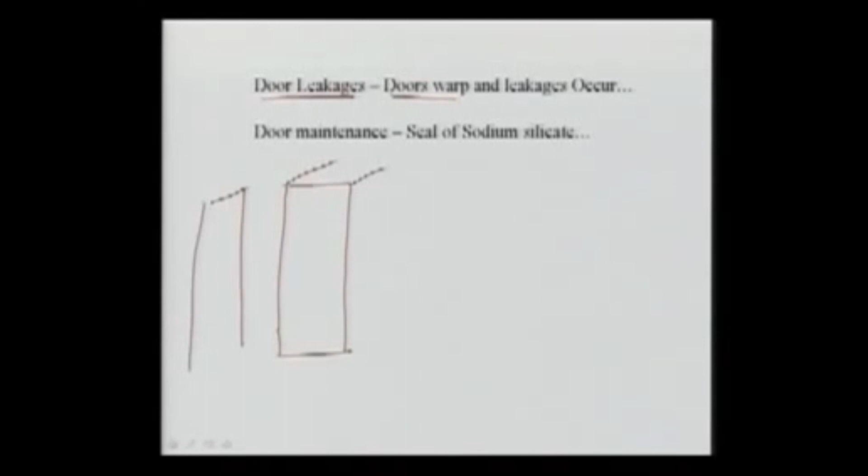The other problem was door leakages. Recall the coke oven door, made of steel, fitted into the steel jamb. Because of high and low temperatures, the sides of the door are not a simple plane, so when it fits, there is always some leakage.

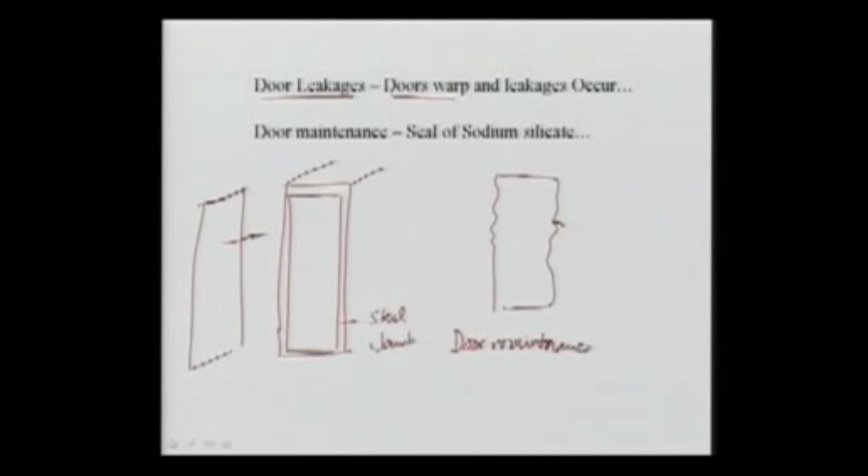So door maintenance is required. Regular maintenance is needed; we have to clean the door and straighten it, making it straight, otherwise the seal will have leakages from sides that are not perfect. We need to stop and do maintenance, and cleaning of the door is important, because particles get deposited and prevent proper fitting, so cleaning the door is required.

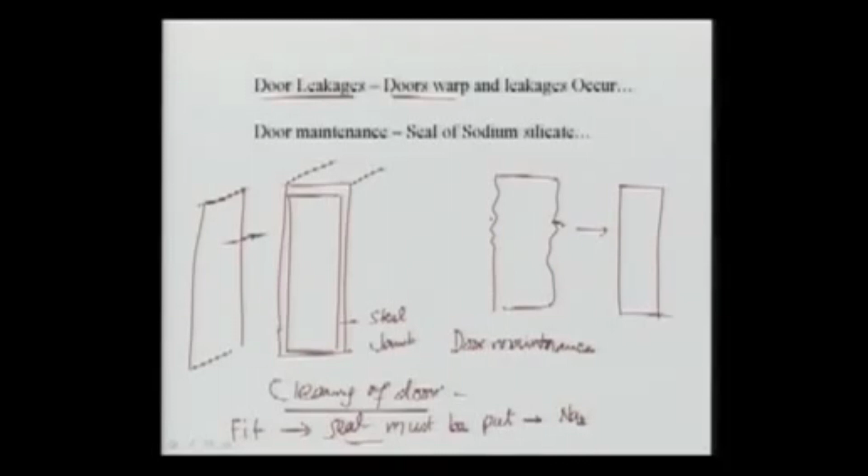Finally, once the door is fit, a seal must be put all around. Nowadays people are using sodium silicate as the seal, and that makes it very good.

So plant managers and engineers have been able to control these emissions very effectively, but to ensure effective control from both production and health points of view, there are also laws and regulations from the Government of India that every plant must follow. Otherwise, the industry can be in trouble, because pollution control authorities can close the plant or impose fines, since these are serious emission issues in coke manufacturing.

So quickly we talked about coke making, the sources, the associated toxicity, and we did an example, and finally showed the possible controls, and on top of the controls there are laws that industry needs to follow. And we'll stop here.